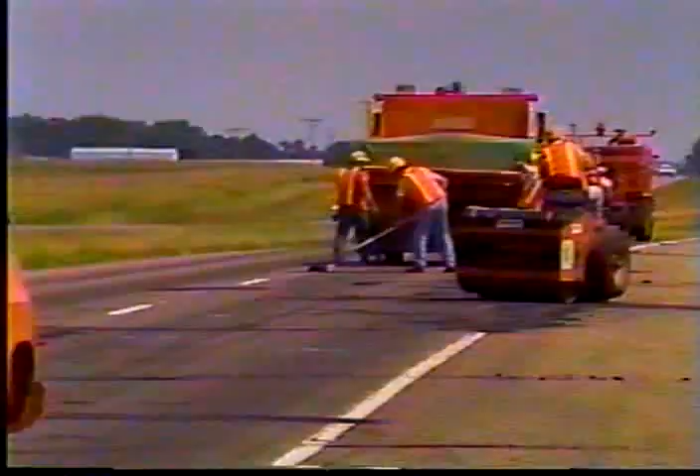A third consideration when you're on the job is image. Not only is safety important at the work site, but so is the way the public sees you and your agency. A professional-looking work crew and properly installed traffic control devices will improve your agency's image and increase the traveling public's respect for your work zone.

So safety, liability, and image are 3 points you need to keep in mind when setting up traffic control at your work zone. You should also remember that drivers don't make the distinctions between construction, maintenance, or utility operations, so we need proper traffic control for all types of work. Now, let's discuss some basic concepts that will help you do your job safely.

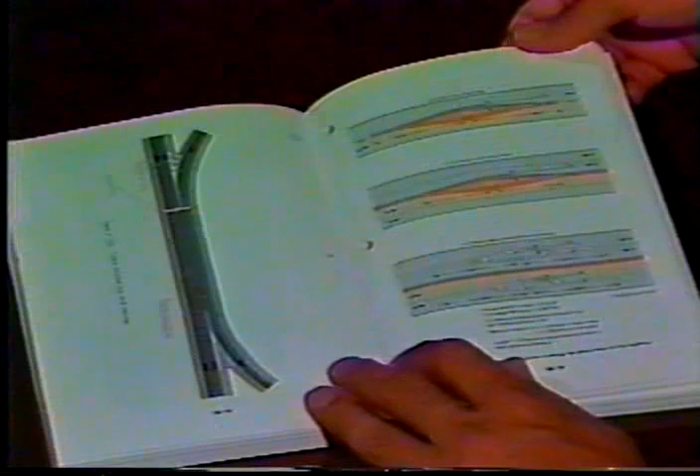To begin, you'll need access to the Manual on Uniform Traffic Control Devices. This manual is the national standard for all traffic control devices. It applies to all streets and highways open to public travel, and it serves as the standard for state and local manuals.

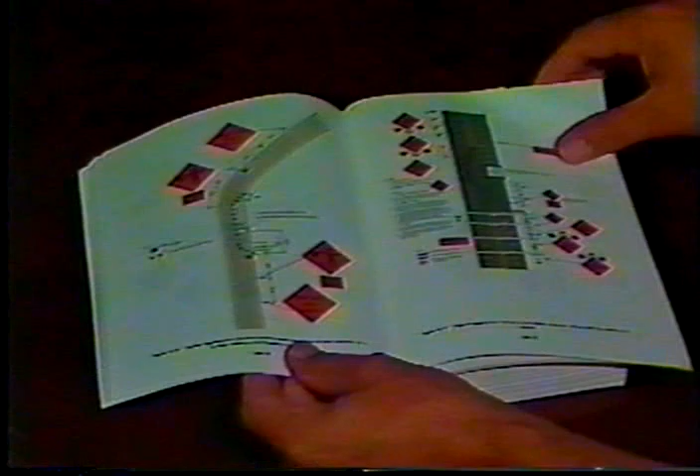Part 6 of the Manual on Uniform Traffic Control Devices covers traffic controls for street and highway construction, maintenance, utility, and emergency operations. It includes illustrations and layouts for several specific work zone applications. Your state or local agency may have also prepared a supplemental manual which shows additional specific applications and layouts.

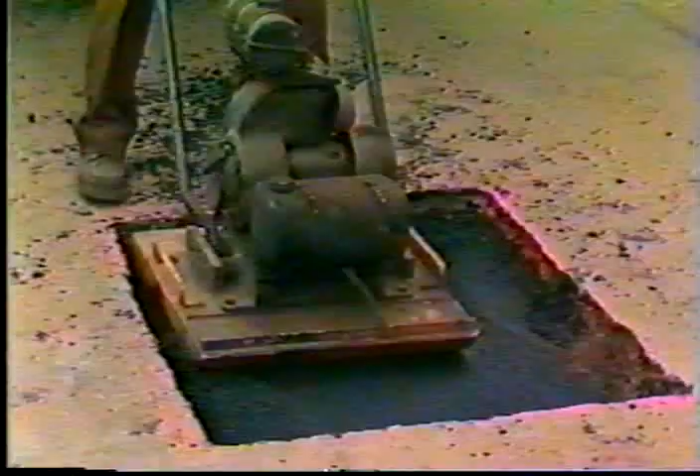Many of the typical work sites you'll encounter are illustrated in the Manual on Uniform Traffic Control Devices. However, the manual does not cover every conceivable situation. Good engineering judgment must be used to determine the best traffic control for a particular work site. This will depend upon the type of work needed, the location and duration of work, the type of roadway, traffic volume and speed, and any potential hazards.

The principles which you should follow to improve the safety of motorists and workers in short-term work areas include the following. First, keep safety of motorists, pedestrians, and workers your top priority. Try to keep traffic conditions as normal as possible, and take the time to plan and install a traffic control scheme. Sometimes this may mean spending almost as much time in setting up traffic control as you spend in completing the work.

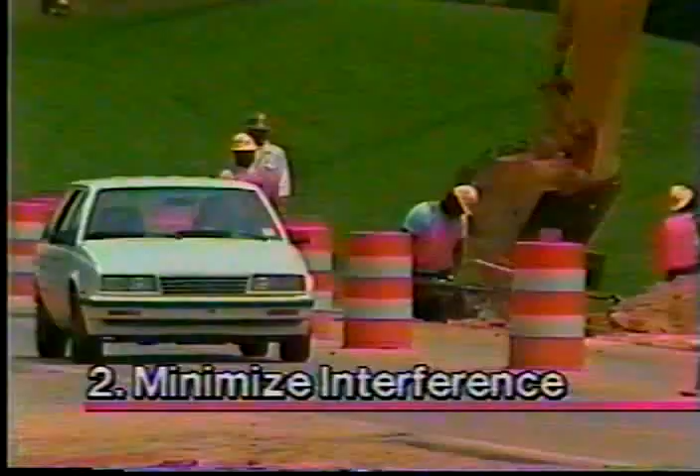Second, minimize interference with traffic movement. Try to maintain the safest maximum speed while eliminating abrupt lane closures. Also provide enough room for work equipment and vehicles inside of your work zone, and then open the roadway again as soon as possible.

Third, present a clear, easily understood message to drivers and pedestrians. Now, this means knowing the exact meaning of each traffic control device that is used. It also means that any conflict in meaning between temporary control devices and those permanently in place must be resolved. For example, you may need to close a lane for maintenance. All of the normal road conditions may guide the driver into the closed lane. Therefore, a special effort must be made to overrule the regular message during the duration of the work.

Fourth, have a plan in mind before going to the work site. The foreman generally takes on responsibility for designing, installing, and maintaining the traffic control plan. Now this includes keeping the control devices in good repair and properly stored so that adequate visibility is maintained. As soon as the project is finished, you should promptly remove the traffic control devices.

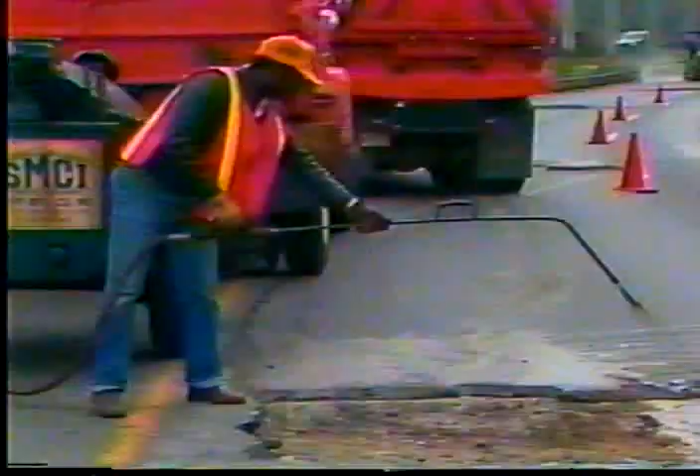Fifth and finally, anticipate the increased hazards caused by your presence on or near the roadway. Be sure to keep your equipment, materials, debris, and yourself out of the path of traffic. This means try to keep a clear roadside through the work area. Use traffic control devices that are lightweight and yielding to lessen vehicle damage.

The traffic control devices selected to assist motorists must satisfy a driver's need for information. You should carefully consider both the message and the placement of the traffic control devices. Inappropriate messages and incorrect placement of signs, markings, and other devices can mislead and confuse the motorist.

In work zones, there are 3 categories of messages which must be conveyed to the driver. These include the warning of potential hazards, information on safe speed, and the lane or shoulder over which a vehicle should be traveling. Drivers have particular problems when traffic control devices give inaccurate information, do not conform to standards, or are improperly installed.

Each person whose actions affect maintenance and construction zone safety should receive training. They must know the following principles. Keep the motorist's respect and the agency's credibility by presenting clean and well-maintained traffic control devices. If work is not in progress or a hazard is not there, take down, fold over, or cover the signs.

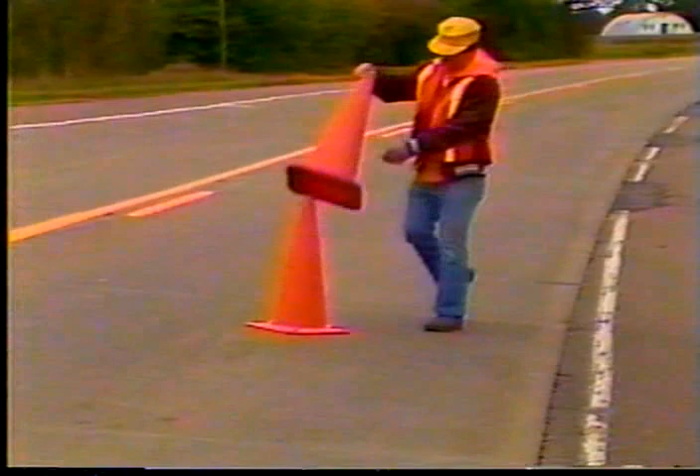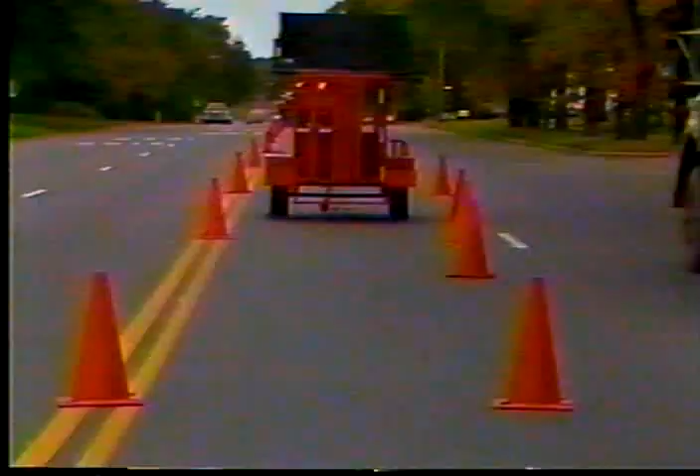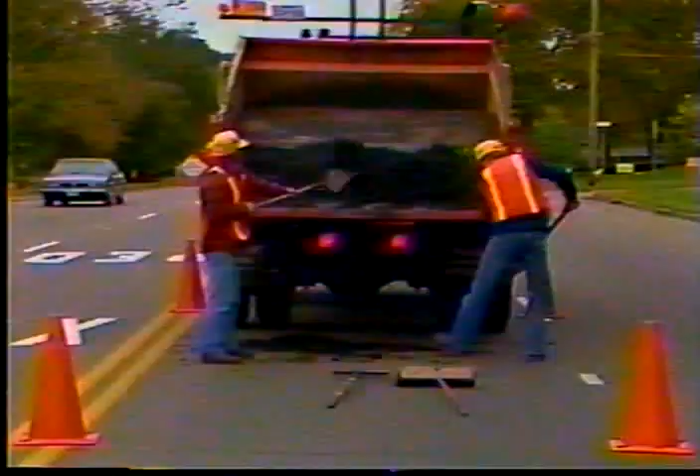Discuss and think about good work area traffic control. Help your co-workers to perform their work with a minimum of exposure to traffic while watching for problems and reporting any damaged or missing devices.

Now, let's review what we've discussed in this introduction to work zone safety. Here are the main points to remember. 1, Part 6 of the Manual on Uniform Traffic Control Devices is the standard for traffic control in your work zones. 2, it may be supplemented by state and local manuals, and these should be consulted before setting up a work zone. 3, plan your traffic control before going to the work site.

Good planning includes carrying the proper signs, cones, and other devices needed to safely do the job. Be sure they're clean and in good repair. 4, only display those devices that are needed by the driver. If the work zone traffic control device is not needed, remove, cover, or lay it down as soon as possible. Don't mislead the public. 5, always ask yourself, how does it look to the unsuspecting driver approaching my work site? What's the driver's view?

We've taken a look at the reasons for proper traffic control and its relationship to safety in the work zones. Now, in the following parts, we'll be reviewing the concept of traffic control zones, the types and uses of traffic control devices, and we'll be reviewing some typical applications that you'll be using in your work.

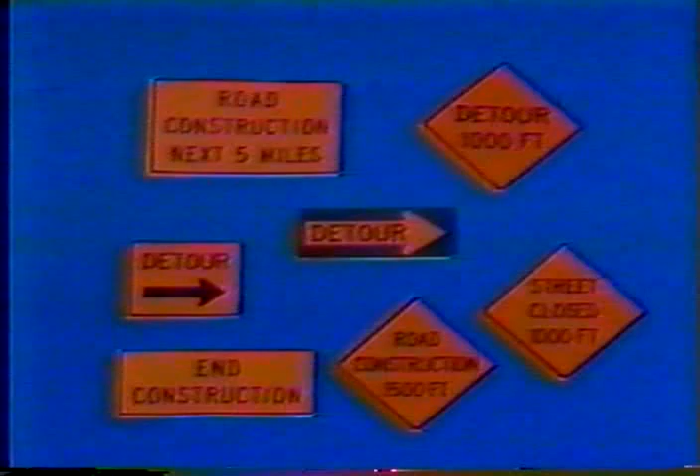Guide signs show destinations, directions, services, points of interest, and other geographical or cultural information. Informational signs are required at work zones for standard route markings when temporary route changes are necessary. Directional signs and street name signs are used with detour routing and may have a black legend on an orange background. Special information signs relating to the work being done also have a black message on an orange background. Some examples are road construction next 5 miles, end construction, detour, pilot car, follow me.

Standard signs and messages, as shown in the Manual on Uniform Traffic Control Devices, should always be used. You see, drivers are familiar with those signs and they know how to react. But non-standard sign messages could be confusing. All signs should be made in a professional sign shop or purchased from a reputable business. Now, homemade signs are immediately suspect and do not command driver respect.

Now, when choosing signs, the following should be considered. Choose signs that are appropriate, that accurately describe the work situation. Use your common sense and the Manual on Uniform Traffic Control Devices in selecting signs. Use specific warning signs to warn of specific hazards, not general signs that simply say men working. The message on signs should tell what action the driver needs to take. Use larger signs when greater visibility is needed, especially with high speed or volume.

At the beginning of the work area, start with an advance road work ahead sign. Then use signs with more specific messages, with the most specific sign stating what action should be taken by the driver closest to the work area. Drivers sometimes forget what they're told, so the last sign in the advance warning area should tell them specifically what to look for or to expect, such as a flagger or a right lane closure ahead.

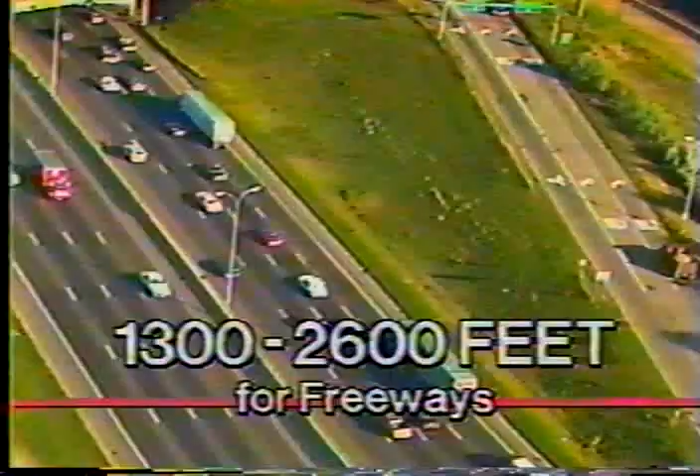The message ahead is generally used on the warning signs for short-term work sites. The overall effect of the signs should make the driver aware of what he or she is approaching and what action will be required. In keeping with the Manual on Uniform Traffic Control Devices, a rule of thumb for the spacing between signs in a series is 200 feet for 2-lane city streets, 500 feet for rural roads and multi-lane city streets, and 1,300 to 2,600 feet for freeways.

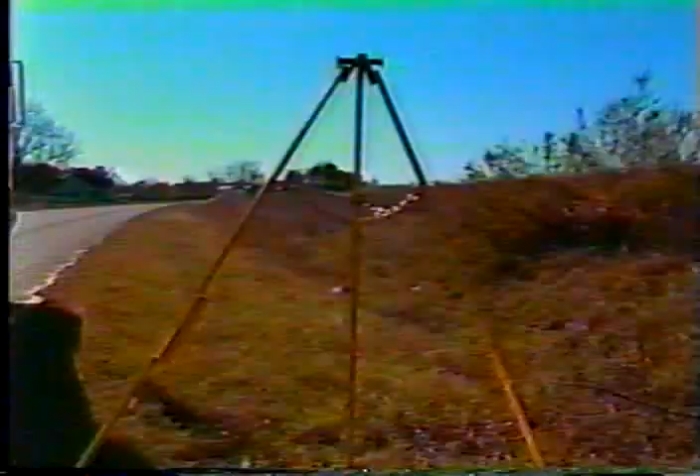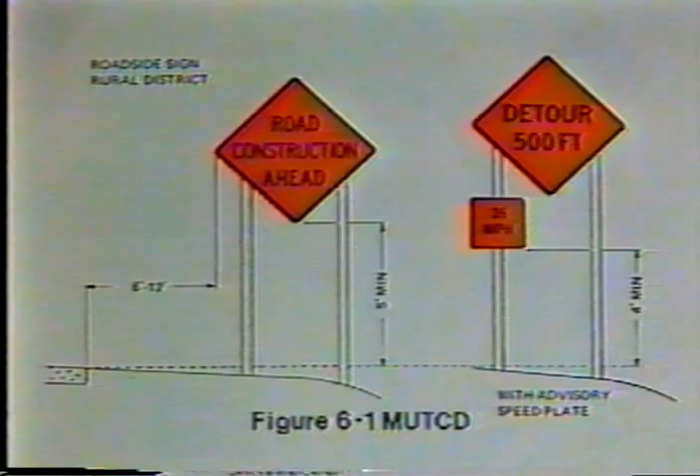Lightweight, yielding, or breakaway supports should be used for all sign installations. Sign installations should be reviewed to avoid any possible glare from vehicle headlights. The minimum height requirements for signs attached to posts is shown. Signs on portable supports are required to be at least 1 foot above the roadway.

All signs used at night are required by the Manual on Uniform Traffic Control Devices to be retroreflective or externally illuminated. Lighting from existing streetlights does not meet this requirement. Pavement markings are very important in guiding traffic through work zones. Pavement markings, delineators, and channelizing devices outline the traffic path around a work area. Drivers use pavement markings as a primary means of guidance.

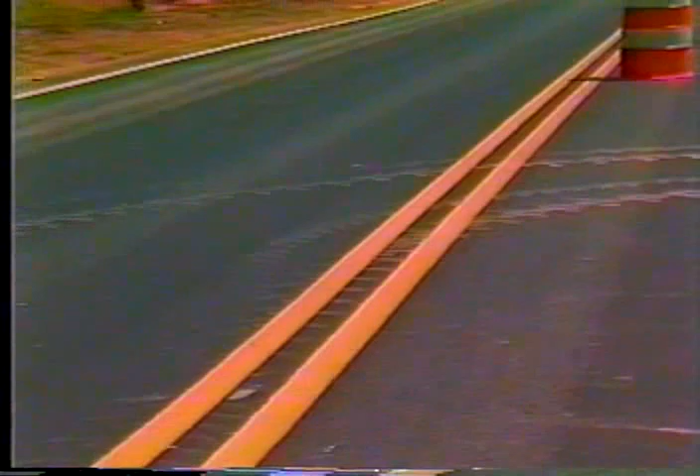The standard markings planned for the road should be in place before opening a new facility to traffic. Also, if revised lane patterns are planned for the work zone, temporary markings should be placed before the traffic is changed. Where this is not feasible, such as during the process of making a traffic shift or carrying traffic through surfacing operations, temporary delineation may be accomplished with lines of traffic cones, other channelizing devices, or short strips of adhesive-backed reflectorized tape.

When pavement placed during the day is to be open to traffic at night, and permanent striping cannot be placed before the end of the workday, a temporary stripe should be applied to indicate to the driver the location of the lane or center line.

Channelizing devices are used to warn and direct traffic away from or around a work area. They also control the flow of traffic when separating two directions of travel. They include barricades, barriers, vertical panels, cones, tubular markers, and drums. Each type has distinct visibility characteristics and advantages.

The Manual on Uniform Traffic Control Devices requires that channelizing devices used at night be reflectorized with a material having a smooth, sealed outer surface. This includes commercially available reflectorized sheeting and tape strips. It does not include the use of pavement marking tape.

Some devices are easily knocked down and require a weight, such as a sandbag. These weights must be placed at the bottom of the device for stability and to keep the weight from being thrown if hit. Neither the device nor the weight should cause excessive damage when struck. Sandbags should not be placed where they will be a hazard to the driver or limit the view of the device.

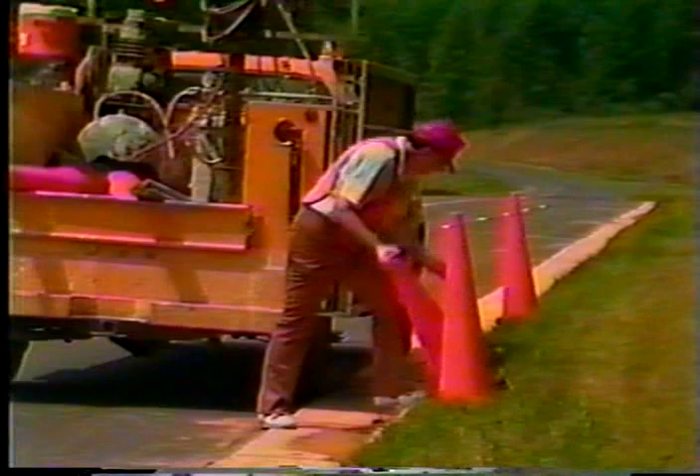Cones are lightweight channelizing devices that may be stacked for storage. They are easy to place and remove and are a minor impedance to traffic flow. For stability, a rubber or sand collar or a specially weighted base may be added. When purchasing cones, specifications may require 60% or more of the weight in the base, thus removing the need for extra base weights or collars.

Cones cause little or no damage when hit. They must be at least 18 inches high, but 28-inch cones must be used on freeways and other roadways where speeds are 45 miles an hour or greater. At night, 28-inch cones or larger should be used. 28-inch cones must have a 4-inch wide band, 2 inches below a 6-inch band. Any cone height less than 28 inches is not acceptable for nighttime use.

Using cones can have disadvantages because drivers have less respect for them, and cones can be easily displaced or knocked over unless properly ballasted. When cones are used, they should be checked periodically, and those that have either been displaced or knocked over should be reset.

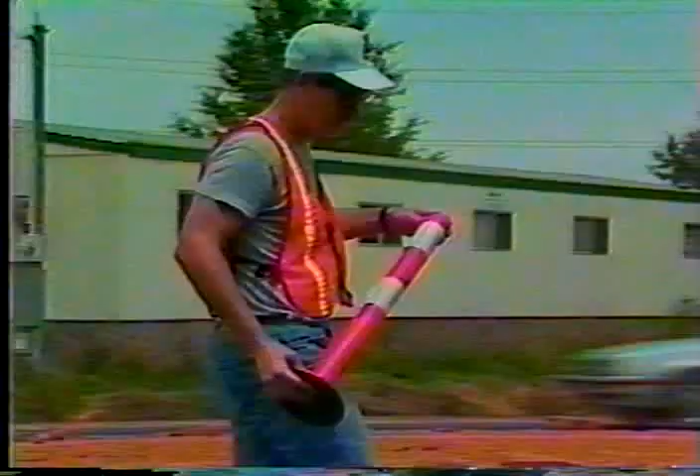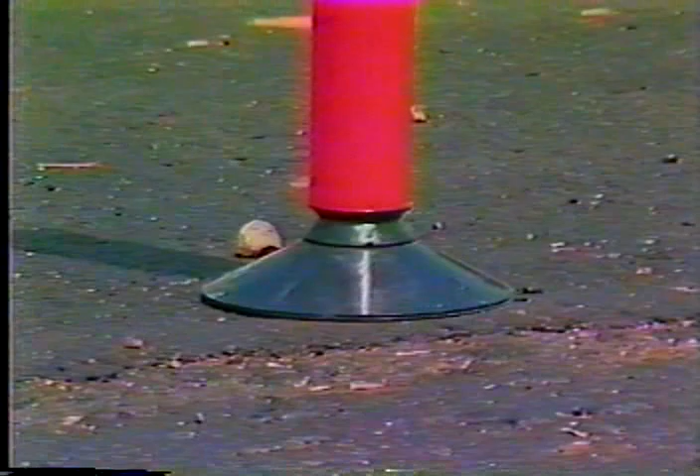Tubular markers are similar to cones in that they are lightweight, easy to install, and are a minor impedance to traffic flow. Tubular markers may be set in special weighted bases or fastened directly to the pavement. Because of their narrow size, they offer a particular advantage when forming new lanes or separating two-way traffic for a short-term activity.

Tubular markers are at least 18 inches high, with taller devices preferred for better visibility. If used at night, the Manual on Uniform Traffic Control Devices requires that they be retroreflectorized. Tubular markers have the same disadvantages as cones, plus having less visible area.

Vertical panels are used as either channelizing or warning devices, but are not as portable or easy to install as cones or tubular markers. They are useful in narrow areas where barricades and drums would be too wide. Vertical panels should be mounted on lightweight posts, driven into the ground or placed on lightweight portable supports. They may be mounted back to back and used between opposing lanes of traffic.

Drums are used as either channelizing or warning devices. They're highly visible, give the appearance of being formidable objects, and therefore command the respect of drivers. Plastic, not metal drums, should be used.

The manual on uniform traffic control devices requires that markings on a drum be horizontal orange and white stripes that are reflectorized, 4 to 8 inches wide. The drum must have at least 2 sets of orange and white stripes, but can also have non-reflectorized spaces of up to 2 inches wide between the stripes.

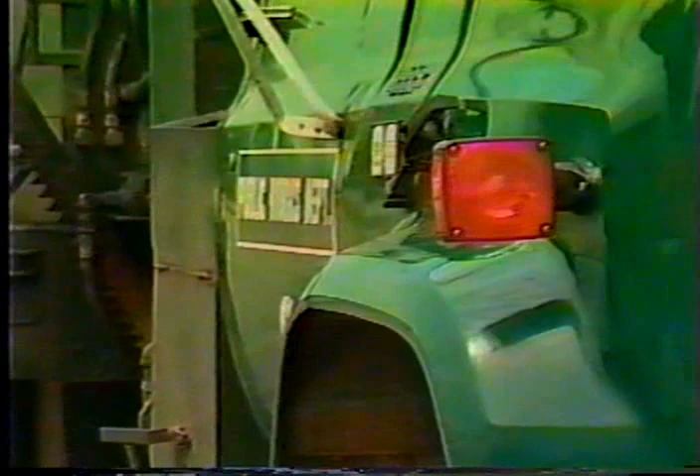These lights should be used in addition to other channelizing and warning devices. However, in some emergency situations where the work may be in progress for a very short time, these lights may be the only warning device.

Arrow panels are signs with a matrix of lights capable of either flashing or sequential displays. Arrow panels are used for moving traffic out of a lane. They may be used at tapered lane closures and with moving operations. They are not a substitute for a lane closure taper. There are two types of arrow panels: flashing and sequencing.

Arrow panels have four basic operating modes: left arrow, right arrow, left and right arrow, and caution mode, four or more lamps arranged in a pattern which does not indicate a direction.

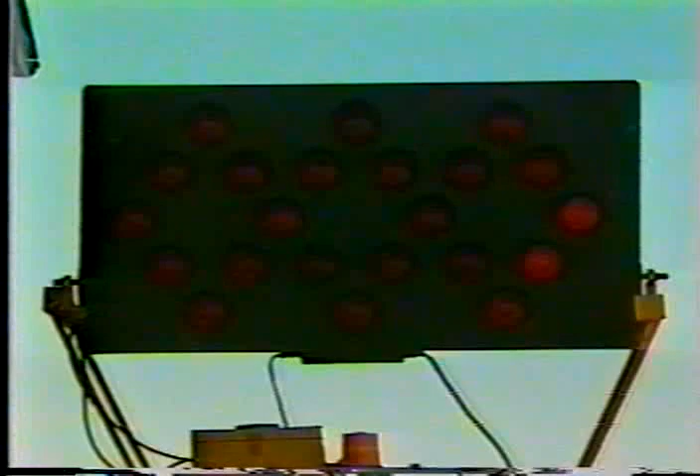Flashing arrows must never be used on two-lane roadways because traffic may be directed into a head-on collision. Arrow panels on two-lane roads can only be used in the caution mode with no arrows.

Flashing hazard identification beacons are used in work areas both day and night to alert drivers of a critical point in the highway, such as a truck crossing, and have the same meaning as permanently mounted beacons. Flashing beacons are not used for channelization.

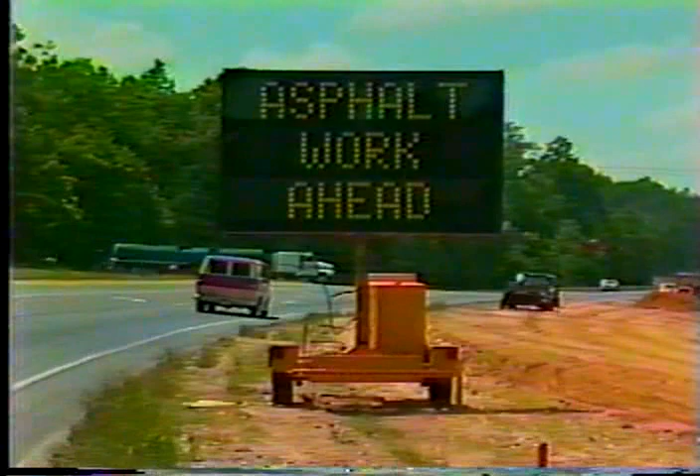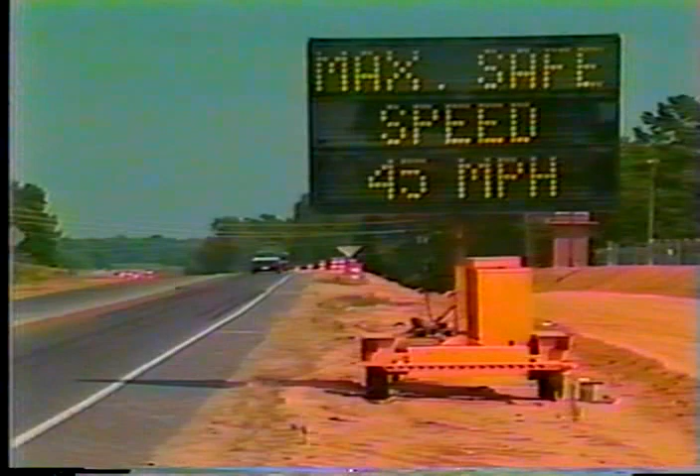Portable variable message signs capable of displaying various messages to the motorist will sometimes help construction zone signing. These devices are normally trailer or truck mounted and have their own power system. Because they're expensive to buy and operate, variable message signs are normally used for more complex traffic control plans.

When using a variable message sign, be sure the message is clear. A lengthy message may distract the motorist too long. The word order in a message can also cause problems. For example, "right lane closed, merge" would get a different driver response than "lane closed, merge right." Yet the messages are similar, except for the beginning point.

This concludes our brief review of traffic control devices. Particular details will be found in the Manual on Uniform Traffic Control Devices. Now, in the following section, we'll be discussing the concepts and elements of traffic control zones.

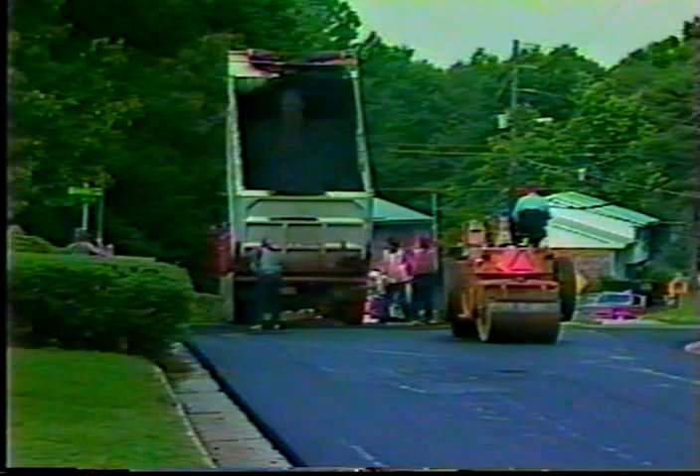When traffic is affected by construction, maintenance, or utility operations, traffic control is needed to safely guide and protect motorists, pedestrians, and workers in and through work zones. This zone is the area between the first advance warning sign and the point beyond the work where traffic is no longer affected. Most traffic control zones can be divided into 5 areas.

In this part of the training, we'll look at each of the areas and examine them for one direction of travel. If the work you'll be doing affects more than one direction of travel, the same principles we cover here will apply to traffic in all directions. These are the 5 areas of traffic control we'll be discussing. Accidents can occur in all of these areas if they're not properly controlled.

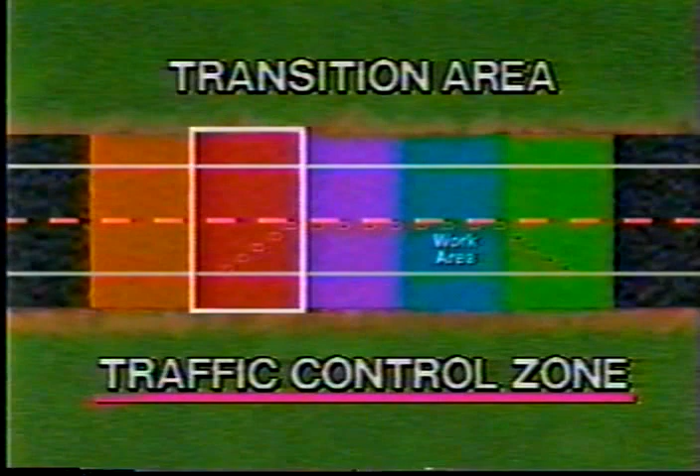Advance warning area, transition area, buffer space, work area, and termination area. The advance warning area prepares drivers and alerts them to what's coming. An advance warning area is necessary for all traffic control zones because drivers need to know what to expect. Before reaching the work area, drivers should have enough time to adjust their driving patterns.

In the advance warning area, traffic control devices may vary from a series of signs starting a mile in advance of the work area to a single sign or flashing lights on a vehicle. The advance warning area, from the first sign to the start of the transition area, should be long enough to give the motorist enough time to respond to the control devices. For most operations, the length can be 1 mile for freeways or expressways, 1,500 feet for most other roadways or open highway conditions, or 1 block or more for urban streets.

Next is the transition area. When work is performed within 1 or more traveled lanes, a lane closure is generally required. In the transition area, traffic is channeled from the normal highway lanes to a new path, which is required to move traffic around the work area. Most often, this is accomplished with tapers to close the lanes.

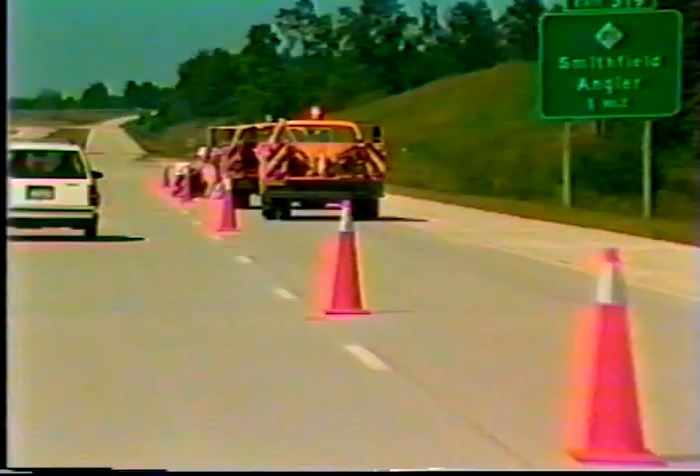The transition area should be obvious to drivers. The correct path should be clearly marked with channelizing devices so the drivers will not make a mistake and follow the old path. If the existing pavement markings create confusion, temporary markings should be used. A taper is a series of channelizing devices placed at an angle to move traffic out of its normal path. There are 5 general types of tapers used in traffic control zones.

Merging tapers close a lane of moving traffic on multi-lane highways where a merge is required. The spacing for channelizing devices should not be greater than the speed limit. Lane shift tapers move traffic to a different lane where a merge is not required. Shoulder closure tapers are needed to close shoulder areas. Two-way tapers control two-way traffic, where drivers are required to alternately use a single lane. These tapers are used when flaggers are present.

Downstream tapers are those installed to allow traffic back into the normal path. The length of each type of taper is very important and is determined by several factors. Let's look at each of these factors in more detail. The length of a merging taper, which is used to close a lane, is determined by the speed of traffic and the width of the lane to be closed.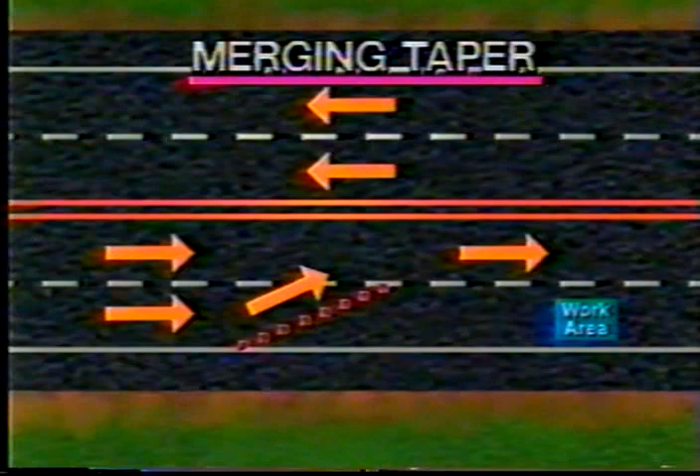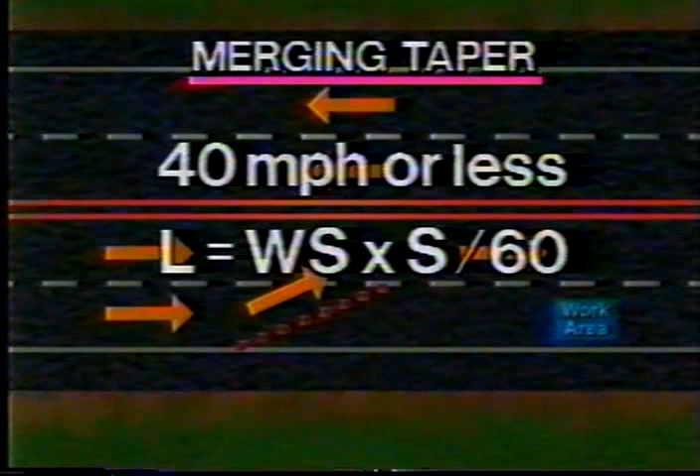The 2 formulas for determining the length of tapers for lane closures are discussed in the Manual on Uniform Traffic Control Devices. For speeds of 45 miles an hour or greater, the merging taper length should be at least the width of the lane multiplied by the speed limit (L = W × S). For speeds of 40 miles an hour or less, the length of the taper should be at least the product of the width of the lane times the speed limit divided by 60. This is actually the high-speed taper multiplied by the factor of the speed limit divided by 60. In most tables, the equation is shown as this: L = W × S² / 60.

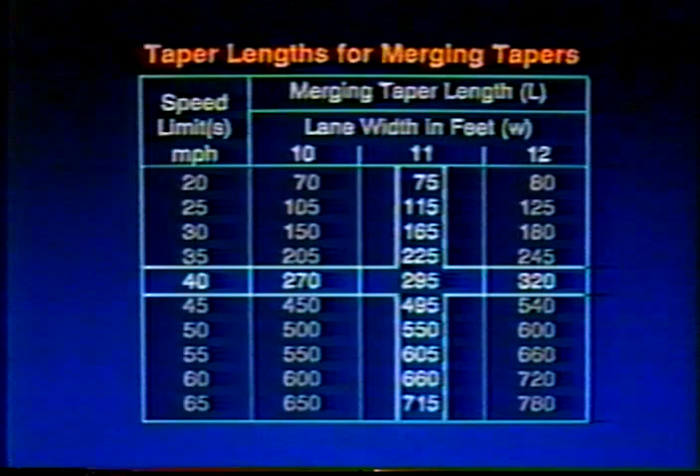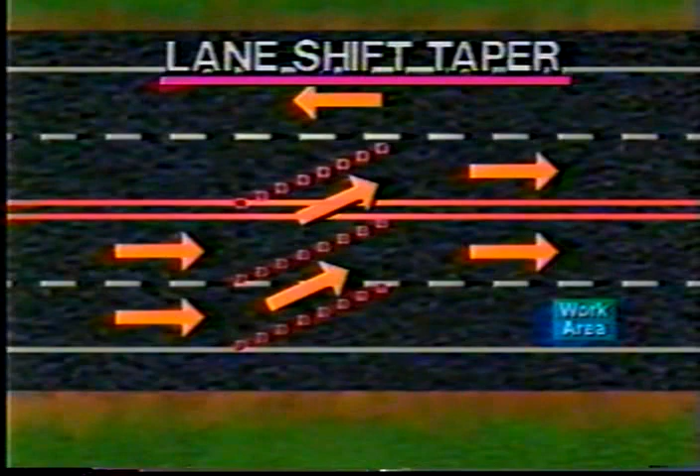Most state and local manuals include tables showing the required taper lengths for various speeds and lane widths. For example, a 40-mile-per-hour speed limit and an 11-foot lane requires a 295-foot merging taper. The lane shift taper is used when traffic is only being shifted and no merge is required. Therefore, the taper does not have to be as long as a merging taper. The minimum taper length is 1/2 L, where L is the computed length of a merging taper for the given speed limit and width of the lane shift.

When an improved shoulder, having a width of 8 feet or more, is closed on a high-speed roadway, it should be treated as a closed part of the roadway. The shoulder taper should be 1/3 L, where L is the shoulder width multiplied by the speed limit. If the shoulder is used as a travel lane, however, the taper is equal to L.

The two-way traffic taper is used in advance of a work area that occupies part of a two-way road when the remainder of the road is used alternately by traffic in either direction. A short taper is used to slow down traffic by giving the appearance of restricted alignment. One or more flaggers or temporary traffic signals are used to assign the right-of-way in such conditions.

Two-way traffic tapers should be a maximum of 100 feet long, with channelizing devices spaced at a maximum of 20 feet to provide clear delineation of the taper. A downstream taper is used at the downstream end of the work to allow drivers back into the lane that was closed. It's placed in the termination area.

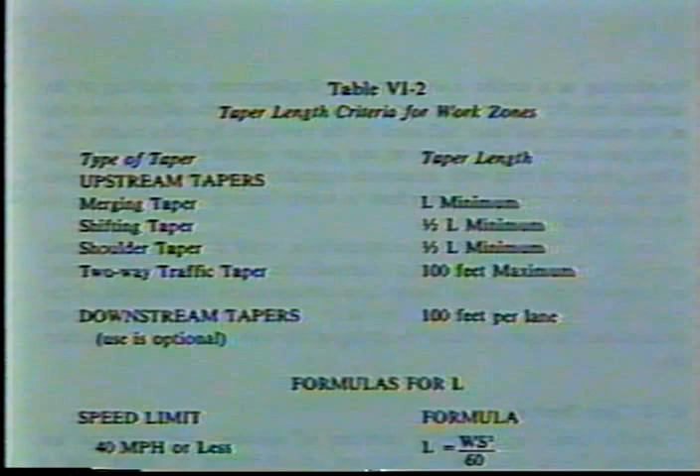Let's briefly review tapers and taper lengths. Where traffic on a multi-lane highway must merge, the required length is a function of the speed limit and the lane width. If traffic on a multi-lane road is to be shifted to a different lane, the taper is 1/2 the length of the merging taper length. When working on an improved shoulder, the required taper length is 1/3 of the merging taper length.

Now, when traffic is on a two-way road and it's reduced to one lane, a taper with a maximum length of 100 feet is needed. And to let the driver know that he may return to the closed portion of the roadway, a 100-foot taper may be used.

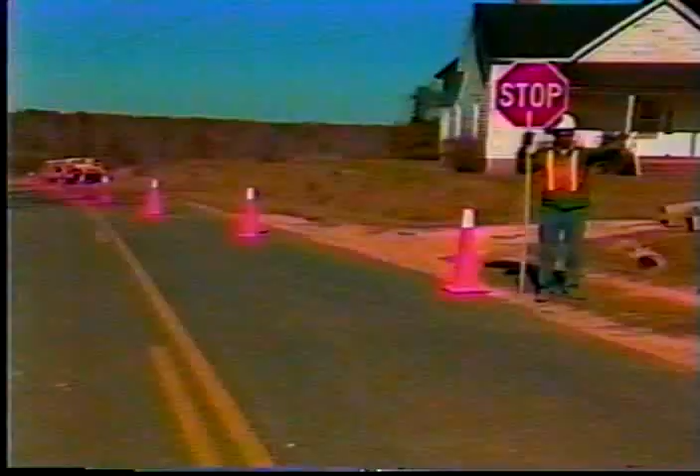If restricted sight distance is a problem, for example, a sharp vertical or horizontal curve, the taper should be moved well in advance of the obstructed view. Beginnings of tapers should never be hidden behind curves. Traffic should be observed to see if the taper is working correctly. Frequent use of brakes and evidence of skid markings are indications that either the taper is too short or the advance warning is inadequate.

The buffer space is the open or unoccupied space between the transition and work area. The buffer space provides a margin of safety for both traffic and workers. If a driver doesn't see the advance warning devices or fails to negotiate the transition, a buffer space provides room to stop the vehicle before actually entering the work area.

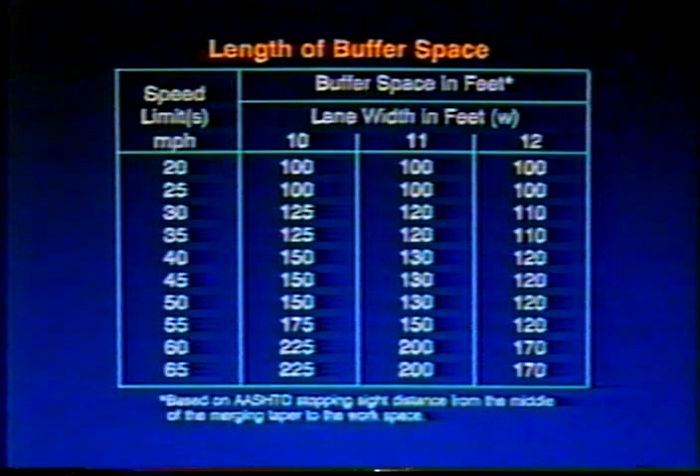The length of the buffer space is based on the stopping sight distance for the speed being considered. The table shows the length of the buffer space for various speeds. This will provide adequate distance to allow the vehicle to stop before entering the work area. The length of the buffer area is measured from the end of the transition area. It is important for the buffer space to be free of equipment, workers, materials, and vehicles.

When designing work zones, the following should be considered for buffer spaces. Place channelizing devices along the edge of the buffer space. The spacing should be no greater than twice the speed limit. Situations occur where one lane of traffic uses a lane that normally flows in the opposite direction. In these situations, a buffer space should be used to separate the two tapers for opposing directions of traffic to help prevent head-on collisions.

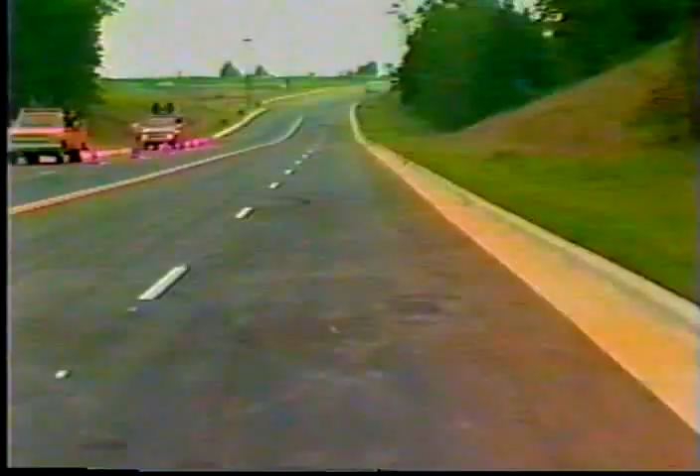The work area is that portion of the roadway which contains the work activity and is closed to traffic and set aside for exclusive work by workers, equipment, and construction materials. Work areas may remain in a fixed location or move as work progresses. The work area is usually delineated by channelizing devices or shielded by barriers to exclude traffic and pedestrians. Every feasible effort should be made to minimize traffic conflicts with the work area. These are suggestions.

Use traffic control devices to make the travel path clearly visible to drivers. For nighttime operations, the traffic control devices must be retroreflectorized and have a large surface area. Place channelizing devices between the work area and the traveled way. Provide safe entrances and exits for work vehicles.

Flags and flashing lights should be considered on work vehicles exposed to traffic, and a truck-mounted attenuator be provided whenever possible to protect work crews. The termination area provides a short distance for traffic to clear the work area and to return to the normal traffic lane. It extends from the downstream end of the work area to the end construction or end roadwork sign. A downstream taper may be placed in the termination area.

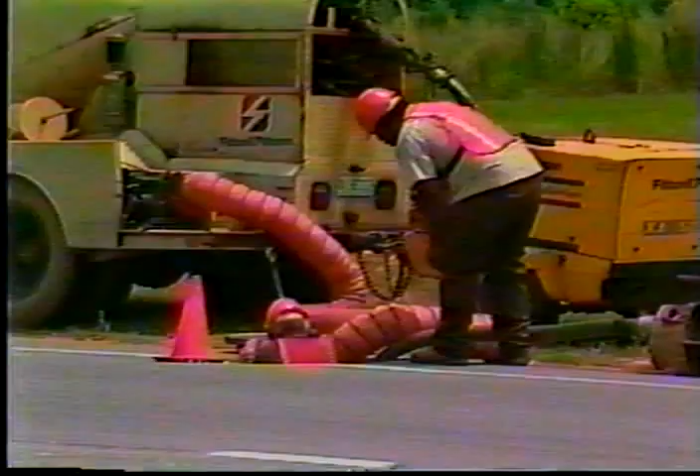For some work operations, such as single location utility or maintenance repair, it may not be necessary to display an end construction sign because it will be obvious to the drivers that they've passed the work area. Avoid gaps in the traffic control at work zones that may falsely indicate to drivers that they've passed the work area. For example, if the work includes intermittent activity through a 1-mile section, drivers should be reminded periodically that they are still in the work zone.

The primary purpose of the guide sign, Road Construction Next Miles, is to inform the driver of the length of the work area. It should not be erected until work begins. In moving operations, the advance warning area may be provided by signs and flashing lights on the work vehicle. Additional advance warning signs may be warranted depending on the volume and the speed of traffic. A shadow vehicle equipped with an arrow panel sign and flashing lights may also be used.

With moving operations, the transition area actually moves with the work area, and the buffer space is the area between the shadow vehicle, if one is used, and the work vehicle. The termination area is usually obvious to the driver passing the work vehicle. The use of a truck-mounted attenuator should be considered for moving operations.

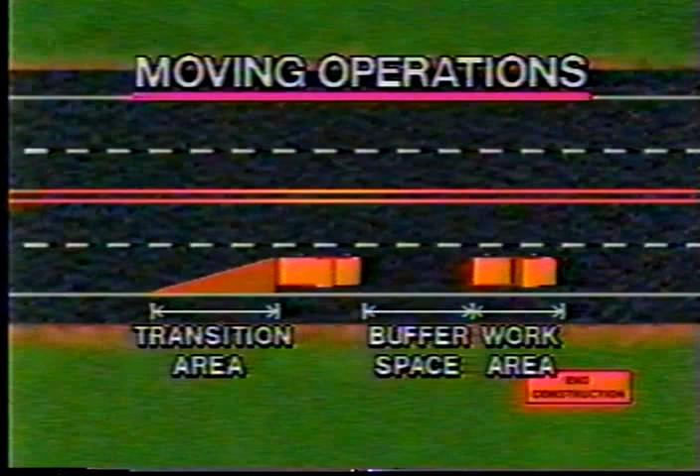Now, as a review, these are the 5 parts of a traffic control zone. The advance warning area alerts the driver that there's something ahead that demands his close attention. In the transition area, traffic is shifted or moved to eliminate interference with work activities. The length of the taper should be computed or obtained from a table. The buffer area provides a margin of safety in case a vehicle runs through the transition area.

The work area is for workers, equipment, and vehicles. The objective is to keep traffic out of this area. And the termination area tells motorists they're out of the construction area and may resume normal driving. This concludes the review of the 5 basic parts of a traffic control zone and their function. In the next session of the series, we'll be reviewing some typical applications that you'll be using in your work.

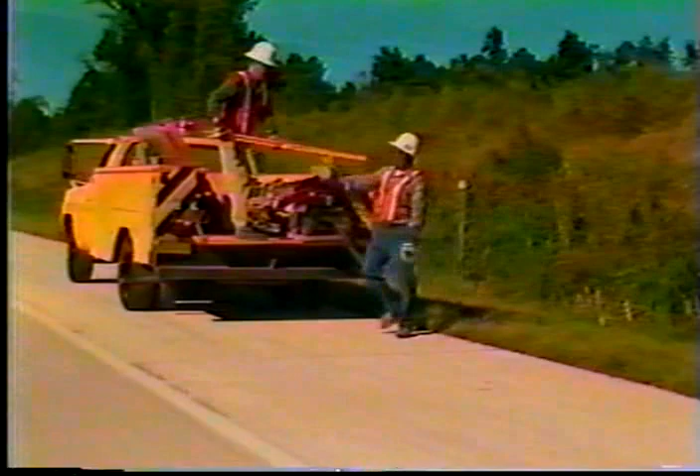Remember, in all situations, the primary purpose of traffic control is to warn and guide the driver while he or she is approaching or passing through your work zone. You are probably most vulnerable during the installation of the traffic control devices. To minimize this hazard, install the devices before work begins, starting with the first device the driver will see when approaching the area. Then continue installing devices, advancing toward the work area.

To evaluate any work zone traffic control, drive through the work zone after all the devices are in place. Difficult as it is, put yourself in the place of the unfamiliar driver, the one who's not anticipating that you're in the roadway. If the traffic control scheme gives the driver the necessary warning and guidance, you and your co-workers will be providing the best protection for yourselves while working on or near the roadway.

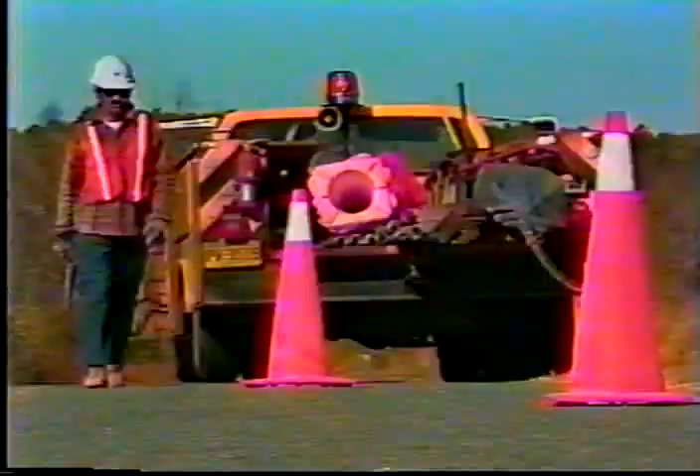As soon as the work is completed, remove the traffic control devices in the reverse order of installation, starting with the termination area and proceeding back to the first device installed. The best way to illustrate these principles is to show the installation of the control scheme for some common types of operations. In the first example, the work is entirely beyond the shoulder or parking lane. Traffic control will generally consist of flashing vehicle lights and flags. An advance warning sign should be used when the work will interfere with traffic in any way.

Now, let's look at work on the shoulder or parking lane. If there is no direct interference with traffic, the motorist should be warned with the sign "Shoulder Work," as shown. If a shoulder closure is involved, a transition area should be used. The length of the taper should be 1/3 of the lane closure taper length. In this case, the shoulder width is used for the formula instead of lane width.

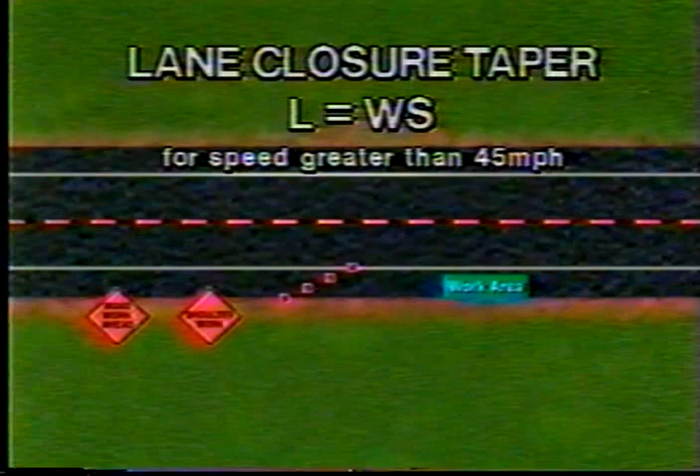Remember that the lane closure taper length is the product of the lane width and speed limit for speeds over 45 miles per hour. Let's assume a 55-mile-an-hour speed limit and a 10-foot shoulder. The lane closure taper would be 10 times 55, or 550 feet. The shoulder closure taper is therefore 1/3 of this, or approximately 180 feet. A buffer zone should be provided in advance of the shoulder work area.

When work is on the shoulder or takes up part of a lane, traffic volumes, types of traffic, this could be buses, trucks, and cars, speed and capacity should be analyzed to determine whether the affected lane should be closed. Now, the lane should not be reduced to less than 10 feet. You can consult Part 6 of the Manual on Uniform Traffic Control Devices.

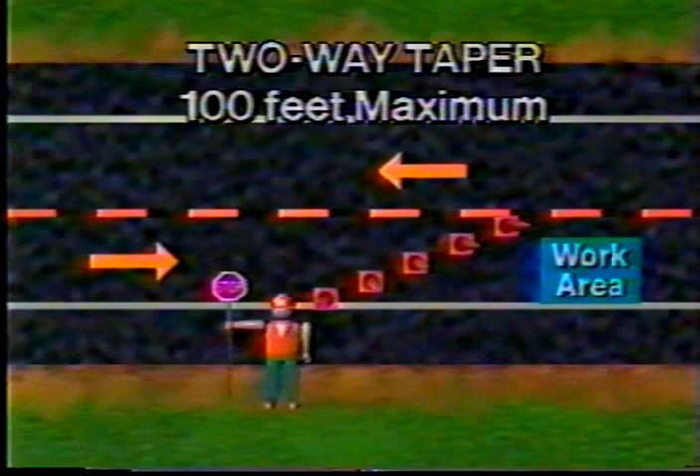When one lane is closed on a 2-lane, 2-way road, the remaining lane must be used by traffic traveling in both directions. The short 2-way traffic taper, 100 feet maximum, is used to slow traffic as it approaches the workspace. This example shows work on a high-speed 2-lane, 2-way road, making it necessary to close one lane of traffic. For this example, the speed limit is 55 miles per hour, and the highway is a major arterial route with relatively high traffic volumes. This makes it necessary to use 2 flaggers and to install the 3 advance warning signs 500 feet apart.

First, install the Road Work Ahead sign for the unobstructed roadway. This sign is placed at least 2,000 feet in advance of the work area. The second sign, One Lane Road Ahead, is placed 500 feet from the first sign. The last sign installed, the flagger symbol, is placed 500 feet from the second sign. The first flagger then assumes his or her station 500 feet from the flagger sign, placing the first flagger at least 500 feet from the beginning of the work area.

The same series of signs are then installed on the side of the roadway on which the work is being done, again starting with a Road Work Ahead sign 2,000 feet from the work area, a 1-lane road sign at 500 feet, a flagger symbol at another 500 feet, and finally, the flagger 500 feet beyond the last sign. At this time, the 2 flaggers begin controlling traffic through the 1-lane section. Next, install the second traffic control element, a 100-foot taper, made up of 5 or more channelizing devices.

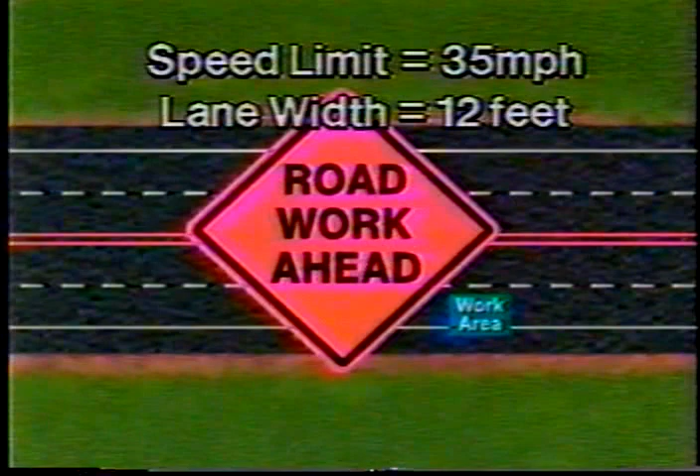The next example is an urban undivided 4-lane roadway. The work being done makes it necessary to close the right lane of the roadway. If the left lane were to be closed, the layout would be reversed. If the posted speed is 35 miles per hour with 12-foot lanes, then the required lane closure taper would be 12 times 35 times 35 divided by 60, or 245 feet. We'll round that off to 250 feet.

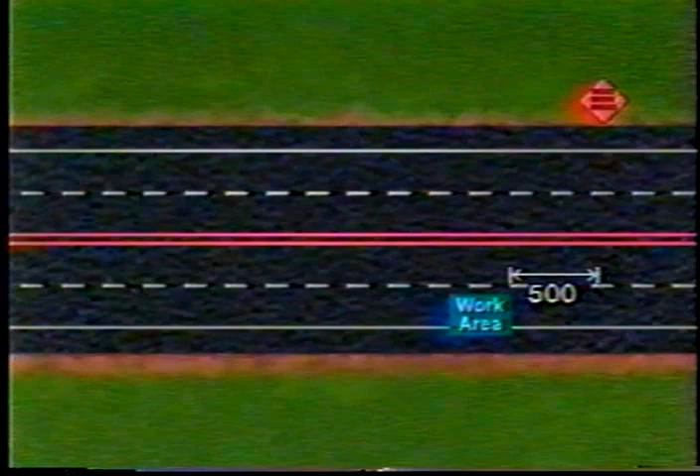The first sign installed for the unobstructed roadway is a Road Work Ahead sign. This sign is placed 500 feet in advance of the work area. The signs for the roadway on which the work is taking place are then installed. The Road Work Ahead sign is placed 1,860 feet before the work area. The next sign is a Right Lane Closed sign, 500 feet from the Road Work Ahead sign. Then, we place a Lane Reduction Transition sign 500 feet from the Right Lane Closed sign.

Now that all of the advanced warning signs are in place, it's recommended that you install an advance warning flashing arrow panel. This is done to give you, the worker, added protection while setting up the taper. If there's a shoulder, the arrow should be placed on the shoulder at the beginning of the taper. If there is no shoulder, it should be placed as illustrated.

For this application, the lane closure taper will consist of 8 channelizing devices on 35-foot centers for a 250-foot taper. It's a good practice to spot the cones or other devices at the proper spacing on the shoulder and then walk them out into the lane. The third element, a 110-foot buffer space, and the fourth element, the work area, are then outlined on both sides with channelizing devices spaced at 2 to 4 times the speed limit or at 70 to 140-foot intervals.

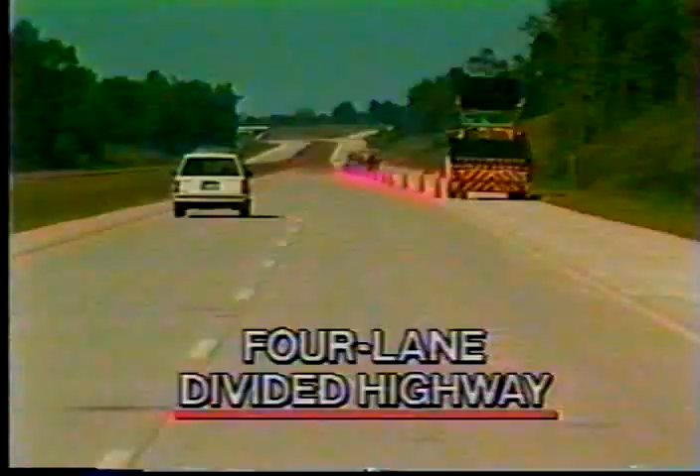The sixth example will be on a high-speed divided multi-lane highway where the work being done requires the right lane to be closed. The first element installed is the advance warning area, which begins 1 mile before the work area. In the previous examples, the advance signs were installed only to the right of the approaching traffic. However, for one-way multi-lane roadways, the advance signs are generally installed on both the left and right sides of the roadway. The first 2 signs installed are the 2 Road Work Ahead signs, 1 mile before the work area on both sides of the roadway.

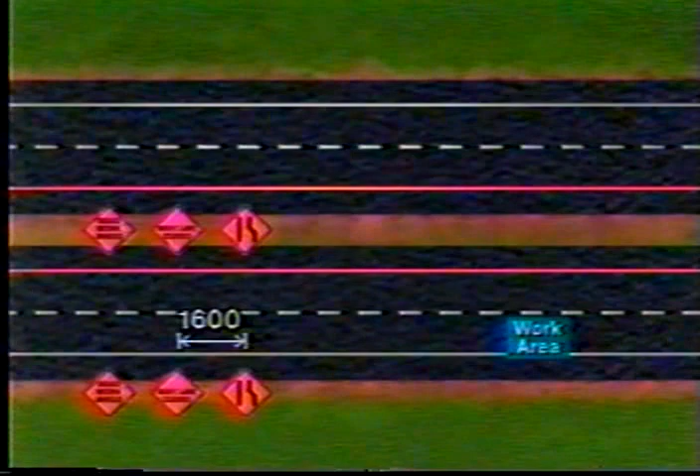Next, 2 Right Lane Closed signs are placed 1/2 mile from the first signs, again, 1 on each side of the roadway. Third, a pair of Lane Reduction Transition signs. These signs are placed 1,600 feet from the Right Lane Closed sign. Next, 1,000 feet from the Lane Transition sign, install the second element of traffic control, the Lane Closure Taper. Again, when setting up the taper, place your work vehicle or an advance warning arrow panel before the start of the taper for added protection.

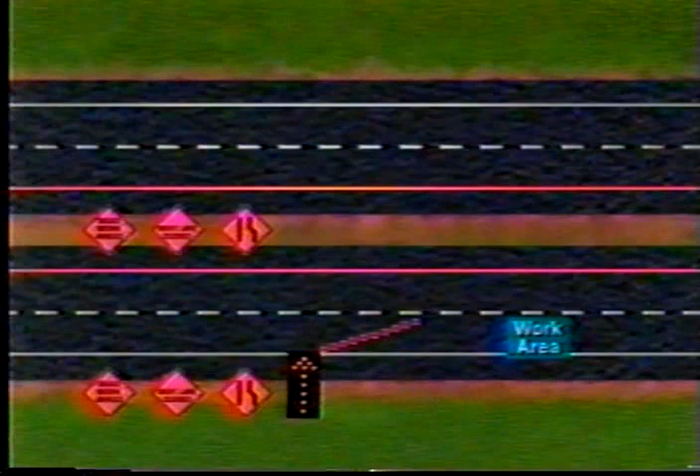With a 55-mile-per-hour speed limit and 12-foot lanes, the taper should be 55 times 12, or 660 feet long. For this example, the lane closure taper consists of 13 channelizing devices on 55-foot centers for a total of 660 feet. The third element, a 120-foot buffer space, and the fourth element, the work area, are outlined by channelizing devices spaced 2 to 4 times the speed limit. For 55 miles per hour, the spacing would be 110 to 220 feet.

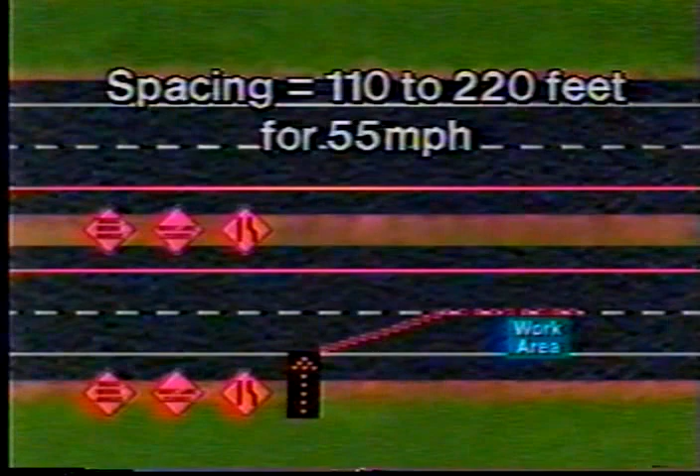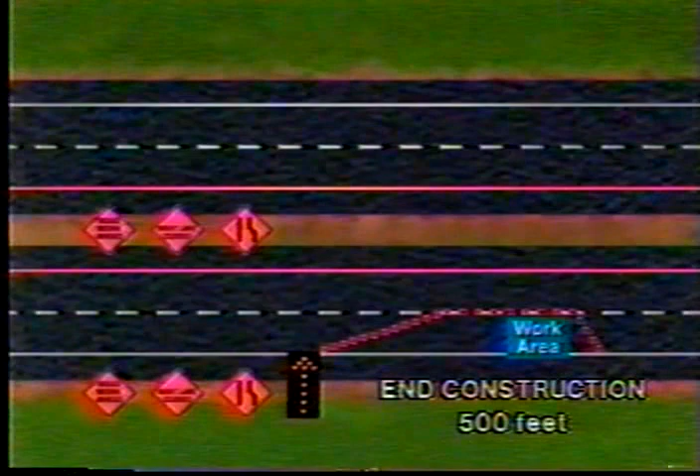The fifth element installed is a closing taper 100 feet maximum. The last element, the end construction sign, is then installed 500 feet from the work area. Finally, the work vehicle may be moved into the closed lane near the work area. Again, evaluate work zone traffic controls by driving through the work zone after all the devices are in place. Remember, put yourself in the place of the unfamiliar driver, the one who's not anticipating your presence on the roadway. Now the work activity may begin. After the project is completed and all workers, materials, and equipment are off the roadway, the traffic control devices are removed in reverse order of installation.

And finally, mobile or moving operations will be shown. Generally, this work uses a moving vehicle train with occasional stops of less than 15 minutes. Warning signs, flashing vehicle lights, flags, and/or channelizing devices should be used. Mobile operations should be used only during daylight hours and at locations that offer good visibility. When the sight distance approaching any two-lane mobile operation is restricted, a flagger should be used to protect the work area and to warn the driver. Traffic control for a mobile operation should include signs, flags, flashers, arrow panel, except 2 lanes, and a shadow vehicle.

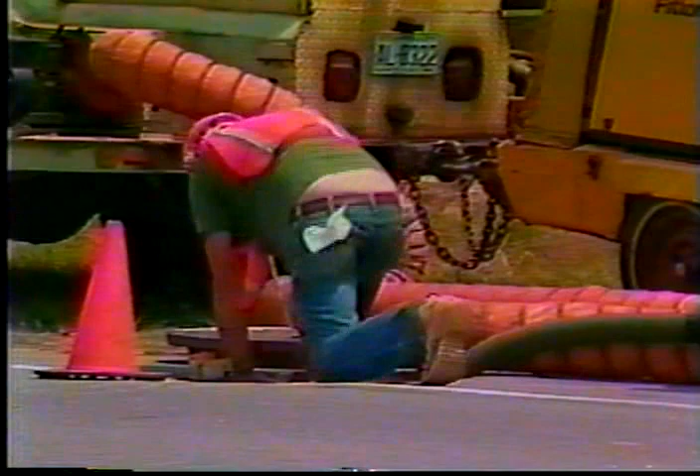Despite the brevity of short-term operations, certain traffic controls are necessary. In urban areas, the work vehicle may be used for warning if it's equipped with flashing lights, rotating beacons, or flags. When it's necessary to enter or leave a manhole, workers should always station a work vehicle upstream from the manhole. Materials or equipment should be stored away from the manhole opening. These principles presented apply to utility work zones and are just as mandatory as those in roadway work.

We have briefly reviewed a few examples of layouts under a number of different conditions. Now, this small number cannot nearly begin to address all the possible situations that you'll encounter. You'll often be called upon to develop your own traffic control plan, providing safety for both workers and drivers. Now, while this task may be time-consuming, it is part of your responsibility that can never be set aside because of the urgency to get on with the job.

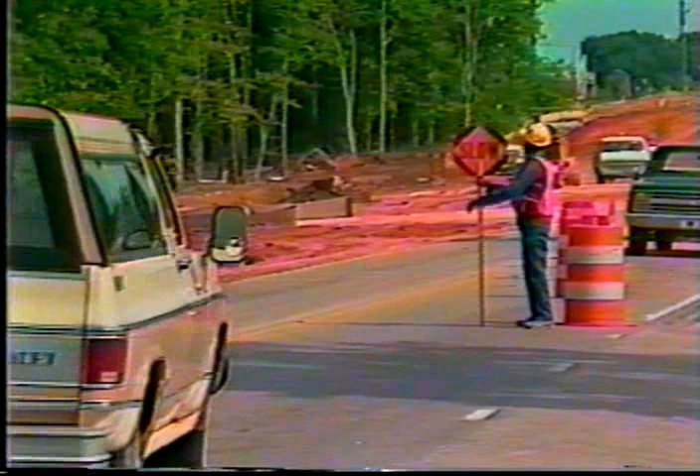Your safety, the safety of your fellow workers, and the safety of the driving public will depend on whether you execute your flagging duties properly. You're in contact with the public, and your attitude directly affects the public's perception of operations.

This tape was developed as an aid in preparing you to be flaggers. If you ever have any questions on flagging operations, never hesitate to ask your supervisor, because a flagger's responsibilities are of primary importance in maintaining safety in the work zone.

Your first responsibility as a flagger is to have the proper clothing and equipment in good condition. Improper equipment reduces the driver's ability to interpret your instructions. Neat dress and appearance also help you gain the driver's respect, making your job that much easier.

Your clothes should include an orange vest, with an orange hat or whatever is required by your agency. Your clothing should make you more visible to traffic and make you stand out from the other workers. It's also a good idea to carry an air horn or whistle to alert your co-workers if a vehicle appears likely to penetrate the work area.

Safety rules and regulations on flagging vary from one road authority to another, and your supervisor will inform you of any specific requirements for your area. The primary traffic control device used by flaggers is the Stop/Slow reflectorized paddle sign, which is octagon-shaped, at least 18 by 18 inches, attached to a staff approximately 5 feet tall.

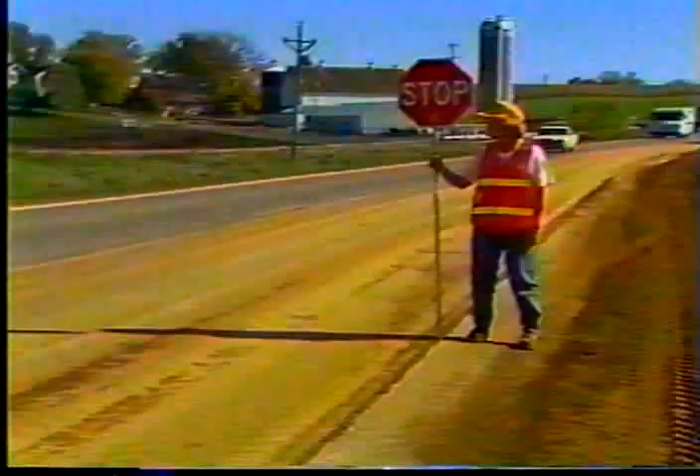and slowing traffic. To stop traffic, stand on the shoulder of the roadway with the stop sign erect and away from your body. Look directly at the approaching traffic and raise your free hand with the palm exposed to the approaching driver.

After you have stopped the first vehicle, walk out to the center of the roadway so additional approaching traffic can see the stop paddle. Remember, never stand in the path of oncoming traffic. After traffic is stopped, there are 2 ways to release traffic. The first way is to release traffic into the left lane, and the second way is to release traffic into

the right lane. To release traffic into the left lane, remain standing in the closed lane, turn the slow side of the sign to face the vehicles, and with your free arm, signal the drivers to proceed in the left lane. Never wave the sign. After all the vehicles have passed, return to your original position on the shoulder to wait for the next vehicle.

Now, the second way to release traffic is into the right lane. After you've stopped the traffic and are standing near the center line, return to your position on the shoulder. Display the slow sign to the driver and, with your free arm, motion the driver to proceed.

In some cases, it may not be necessary to completely stop traffic, but only slow it down. In these cases, always stand on the shoulder of the road, display the slow paddle to oncoming traffic, and use your free arm to motion traffic to slow down. Remember, never stand in the path of oncoming traffic.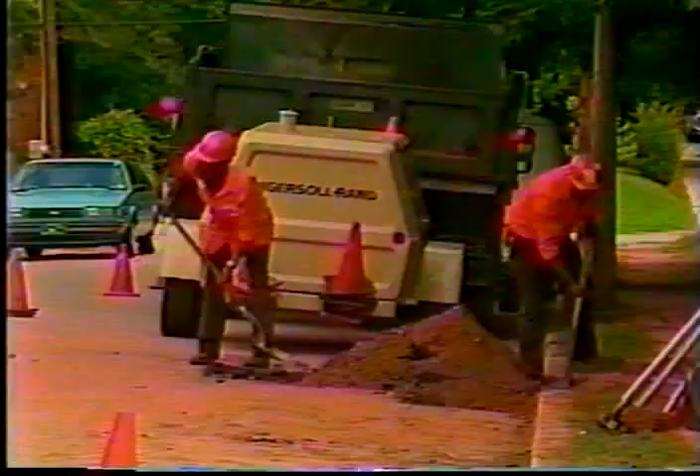The second situation is a one-flagger operation. Sometimes it may be acceptable to use only one flagger to control traffic on a 2-lane road.

A one-flagger operation should only be used on a low-volume, low-speed roadway with good visibility at the work site. The work area should also be relatively short. In a one-flagger operation, the flagger stands on the shoulder opposite from the work area. The flagger should stand in a position visible to traffic approaching from either direction. In this position, the flagger can assign right-of-way with the sign paddle.

The third situation, probably the most common, is the two-flagger operation. In these cases, one flagger is always in charge to coordinate the operation. When two flaggers are used, they must always be able to communicate with one another. This can be done with two-way radios, flag carrying, or sight method, where both flaggers must have visual contact.

The first flagger releases traffic and displays the slow paddle, while the second flagger stops and holds traffic until an all clear is received from the first flagger. This allows the second flagger to release the stopped traffic.

In this example, the flag carrying method of communication is used. The first flagger hands a flag to the last car he allows to go through. When that driver reaches the second flagger, he hands him the flag. Having received the all clear, the flagger can now allow traffic to flow safely in the opposite direction. This operation is very simple. However, communication between flaggers is imperative, and the flagger must be assured that the driver of the last vehicle will pass the flag to the other flagger.

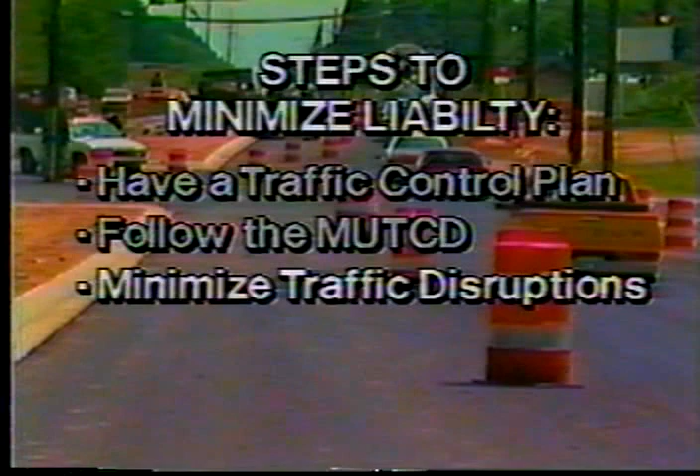Second, always follow the guidelines in the Manual on Uniform Traffic Control Devices. Use traffic control devices which are standard in size, shape, color, and message. Third, try to use a work strategy that minimizes disruption of traffic flow. In particular, try to minimize the amount of time that workers and equipment are on the roadway. Also, don't expect all drivers to slow down at work zones, even when a reduced speed limit is posted. You must make work zones safe at prevailing traffic speeds.

Fourth, promptly remove any traffic control devices which are no longer needed. Fifth, all personnel who install traffic control devices should receive training on the Manual on Uniform Traffic Control Devices and safe traffic handling procedures. Flaggers should receive prior instructions on proper flagging techniques.

It's also very important to inspect work zones to discover damaged or missing devices and to identify safety problems which may develop. Now, a good inspection program includes the following elements. Day and nighttime inspections are essential, and they should be regularly scheduled. The number and frequency of inspections will depend on the location and type of work. Holiday and weekend inspections are also important since traffic accidents don't take a vacation. It's desirable to use an inspection report form. The report form will provide a record of your efforts to ensure safety, and it'll provide a checklist of items to look for. During the inspections, be on the constant lookout for potential safety hazards.

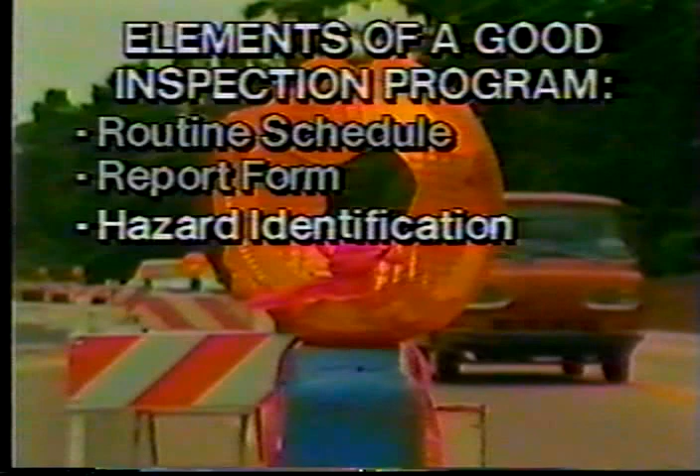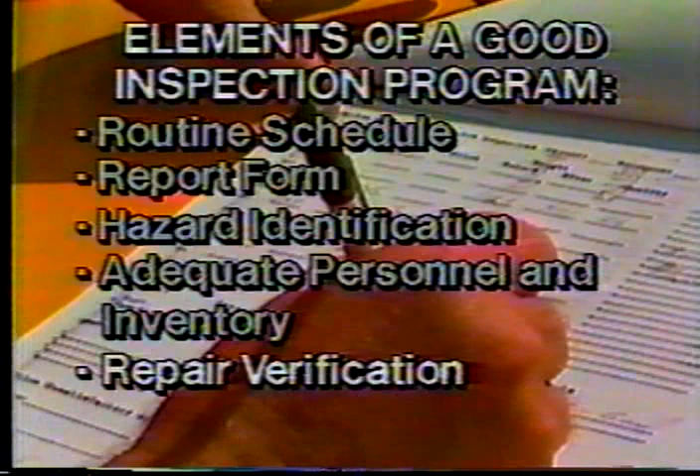Examples of hazard indicators include skid marks on the pavement, impact damage to traffic control devices, and/or undesirable driver actions. If damaged devices or other potential hazards are observed, it's critical to have the personnel and replacement devices readily available to make the needed repairs, day or night. There should be a procedure set up for making sure that needed repairs are made in a timely and proper manner. Finally, the entire inspection and repair process should be properly documented. Lawsuits resulting from work zone accidents often do not come to trial for a year or more. If you don't have written records, it may be very difficult to remember and prove what was done.

Not only is it important to keep written records of inspections, but it's also very important to record key items of information about every work zone. These include the starting and ending time of work, the location of the work, the type, condition, and position of traffic control devices, the names of personnel and the types of equipment used, and any changes in temporary or permanent regulatory traffic control devices. These items can be easily kept in a supervisor's or foreman's diary, even for small maintenance projects.

It is recommended that more detailed information about work zone conditions be gathered and documented whenever there's an accident anywhere near the work area. This additional information could prove useful in the event of a lawsuit, and more importantly, it may help prevent future accidents.

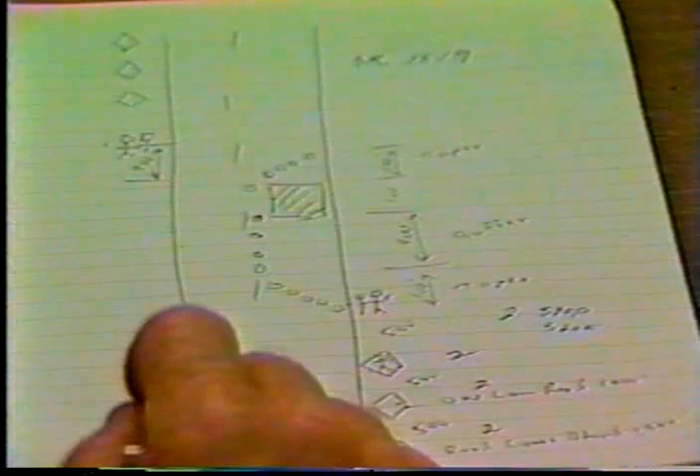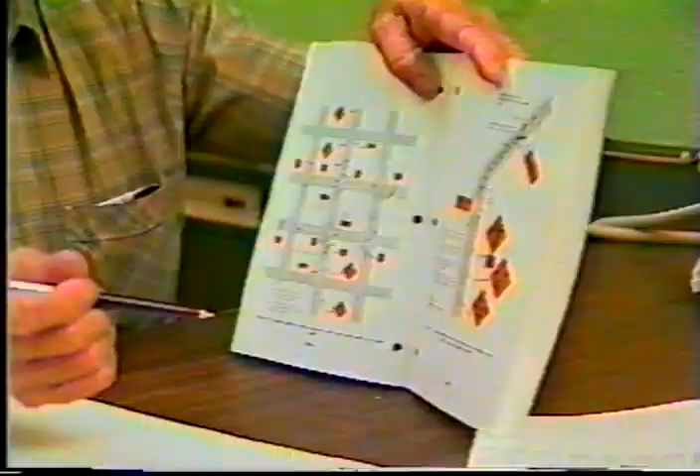All right, Worth, this is kind of the basic way you're gonna have to set that thing up down there. Okay. I don't think you'll have any problem if you set it up like this. Go to your manual and set it up kind of like this. That's what we got it sketched off of. You do have a manual? We've got a manual on our truck. Okay. Always refer back to your manual. This is how we got it sketched here. If you run into any kind of problem, just go back to your manual, and that's your basic way you do things. That's what I do. Okay. I don't foresee any problem.

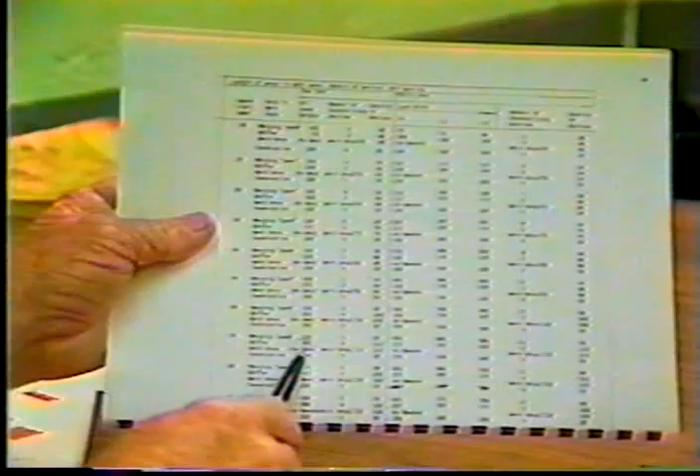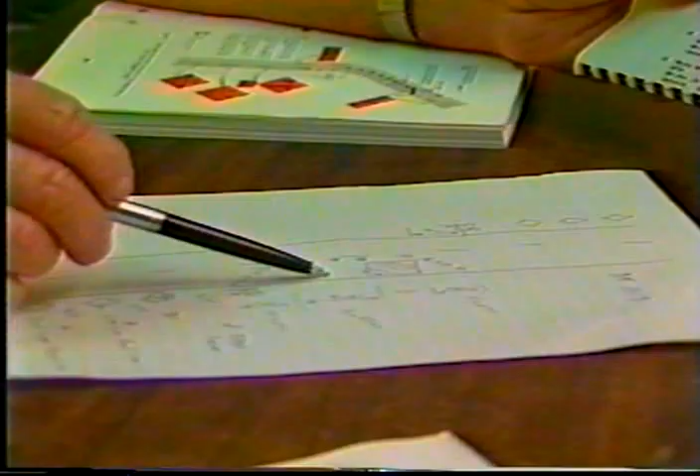You're gonna have to taper this thing now, Worth. Back here, we're gonna have a 400-foot buffer. Okay. 400-foot buffer, all right. Yeah, just taper it off, kind of like you see it right here. Just come back 400 feet away from this job site. That's the reason I sketched this off for you here, so you can see, 400 feet, just like this. You can work that out, all right.

Okay, now, you're gonna need the 2 flaggers. Have to have 2 flaggers. We can get an extra man from maintenance for helping us flag. I think we can take care of it, okay? We'll check with them. See if I can get a man from maintenance. And if they can't give you anybody to help you, you get back with me. I'll be around, and I'll get somebody to help you.

And I want you to look at this now and see if there's anything you think we've left out that we need to do. I don't see any problem with it. And don't forget to be sure to have your taper, your buffer back here far enough, at least approximately 400 feet, to keep them off the people in there working in case they do run through you. Okay, if I see any problem, I'll check out my material this afternoon. If you run into any kind of problem, don't mind calling me, I'll be glad to help you with it. Okay, we'll have that planned for next Monday morning at 8 o'clock. Okay, that'll be fine.

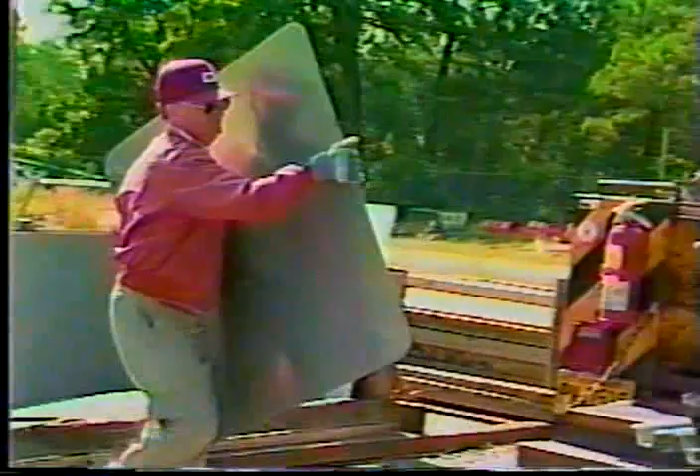First thing in the morning we arrive at work, if we've got a work order from our supervisors in Wilson, we'll first of all fill our sign order, what we have to take out with our equipment. We load our posts and proceed from the maintenance yard to the work site, and depending on whatever the situation may be, that's what we work on.

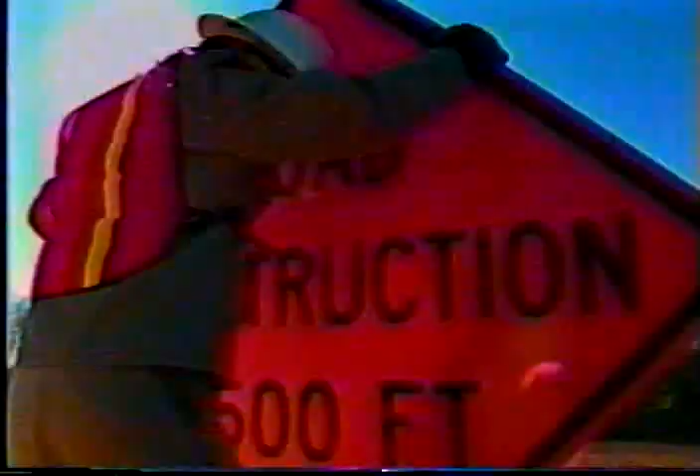Signing is a pretty important job. You've got to make a decision, first of all, what type of sign you're putting out. And then the next thing is the location of where it's to be located. The right footage from the road, get it out of the traffic area, you have people's driveways, you've got different places where you have to decide where the sign is to be put.

Once in a while you get in heavy traffic, you'll wonder how you're going to work that particular zone, but most of the time on secondary roads we can handle it pretty good. We don't have any signing for our truck at all. All we've got is a safety flashing light and our safety blinkers. And that's basically all of the safety we have other than our hard hat and vest. And we have to look out for the traveling public as well.

You know how the public is. Generally, they just try to get by as fast as they can and keep going. Try not to slow down if they can help it. The average person doesn't really pay a lot of attention to the signs, but some of them do, and it's important that they see these signs and heed the message they're reading. If they don't, there could be instances with a lot of death involved if there were no signs.